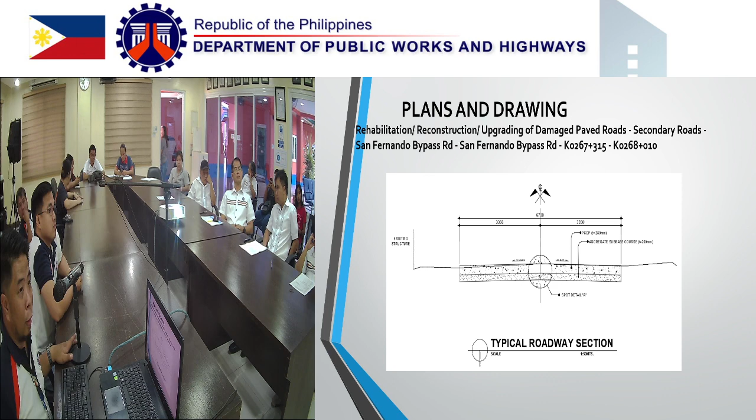The typical cross section: 6.7 meters width carriageway, 3.35 per lane. Thickness of PCCP is 280 mm and the aggregate sub-base course is 200 mm. A straight line diagram.

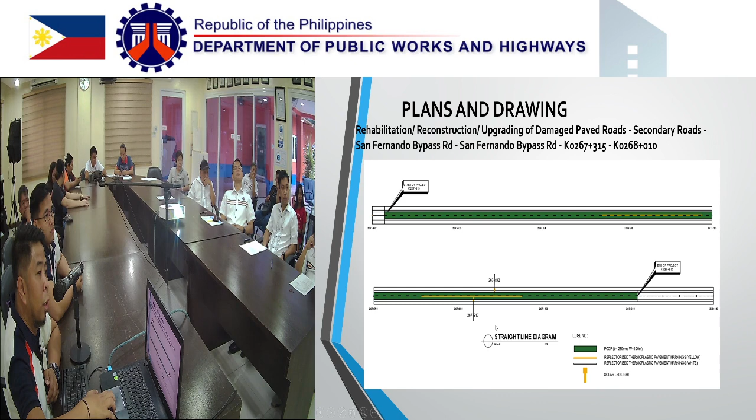So good morning to each and every one of us. So the next project is 24 AE 0022 with the title Construction, Maintenance of Flood Mitigation Structures and Drainage Systems, construction of flood mitigation structure along Barangay Napaset, Luna, La Union.

So with an appropriation of 85,982,000, with an ABC of 84,262,360, and a duration of 311 calendar days, considering all the Sundays, holidays, and rainy days. Scope of work: completion of 650 linear meter of dike and revetment at right bank.

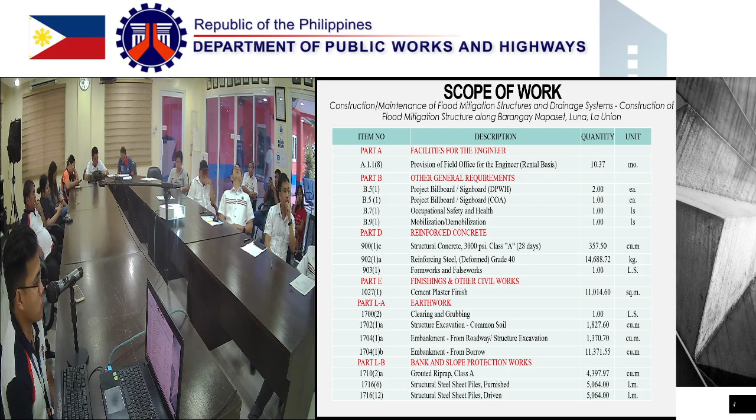So for the computation of the project duration, as what I've mentioned before, we have considered the days that fall under Sundays, holidays, and rainy days. Incorporating those and then adding to the interpolated calendar days based on the Department Order number 71 series of 2013, we come up with 311 calendar days.

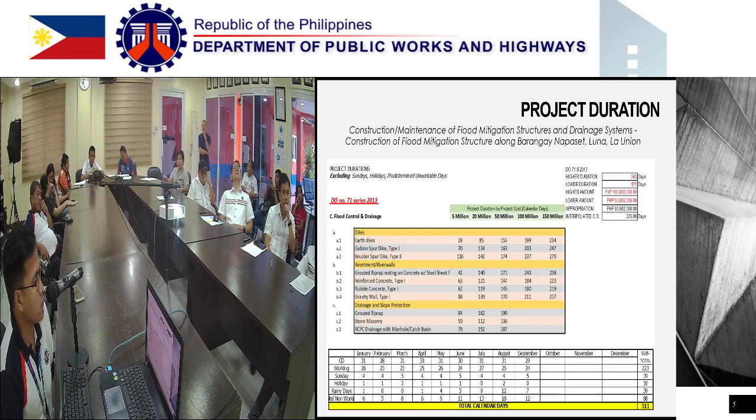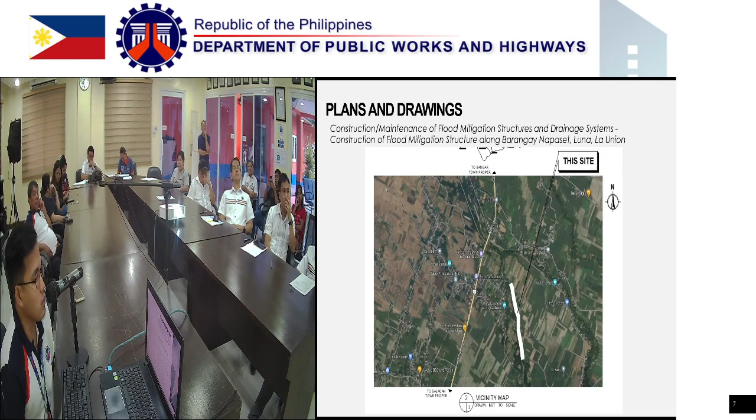So for the references and attachments, we are following significant department orders as well as the updated labor rate CMPD, which was issued by the central office. So we have here the plans and drawings.

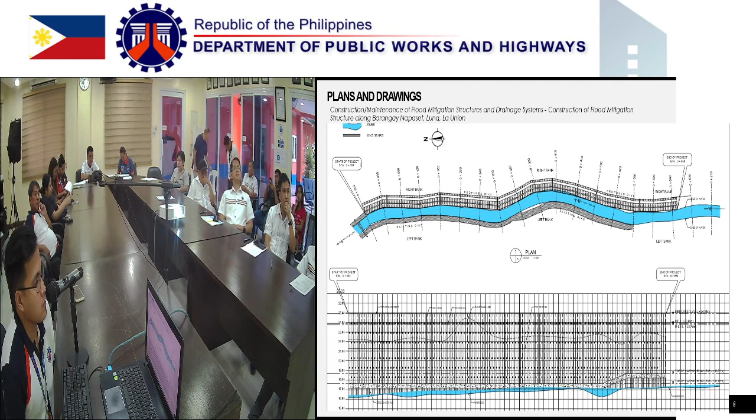And we have here the typical cross section. So for the items of work, we have here the one I mentioned earlier, 1027-1, the plaster finish, which is 50 millimeter thick. The structural concrete composes of our capping beam and the 1 meter slant height that are poured.

And then same goes with item 9021A, reinforcing steel, for the capping beam, slanted at 1 meter length. In 17021A, structure excavation, embankment from borrow, and then we also have here 17102A, grouted riprap, which is class A. So our sheet piles are 6 meters.

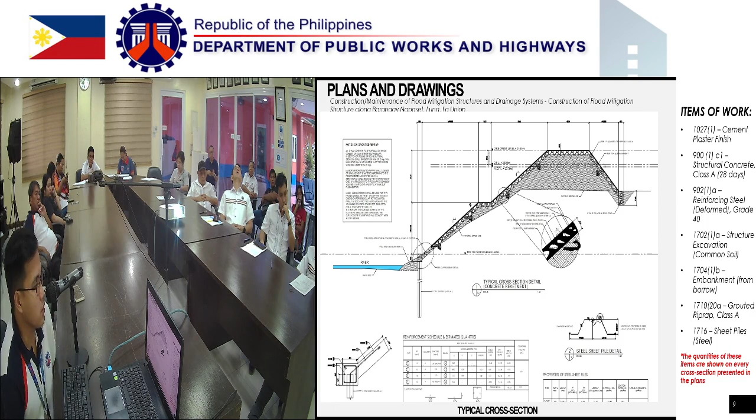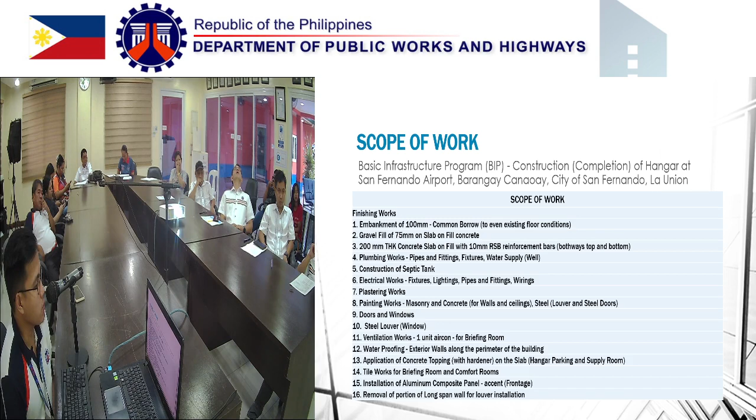Then waterproofing, exterior walls along the perimeter of the building. So application of topping on the slab for the hangar parking and supply room. Tile works for briefing room and comfort rooms. Installation of aluminum composite panel and then removal of a portion of the long span wall for louver installation.

So we have here the final program of works. For part B, we have also here the project billboard for both DPWH and COA, and B7 occupational safety and health program. Then for part C, for earthworks, we have here the structure excavation, common soil, the embankment from borrow, and then the gravel fill.

Then for structural concrete, we have the 901C, the structural concrete 3000 PSI, class A, 28 days. Then we also have here the reinforcing steel, deform grade 40, and then lastly formworks and false works.

Then for finishing and other civil works, we have here the plumbing works, ceiling 4.5 millimeter fiber cement board on metal frame, aluminum glass window, sliding, awning, and fixed type. And then for frames, jamb, steel head, transoms and mullions.

For doors, which is wooden panel. Then waterproofing cement based, glazed tiles and trims, and glazed tiles, cement floor finish, cement plaster finish. Then painting works for both masonry and steel. Then aluminum cladding, PVC doors and frames, metal structures.

Then under your electrical works, we have conduits, boxes, and fittings for wires and wiring devices, panel board with main branch and breakers, lighting fixtures and lamps. And lastly, for mechanical, we have here your ventilating equipment, which composes of our air conditioning unit.

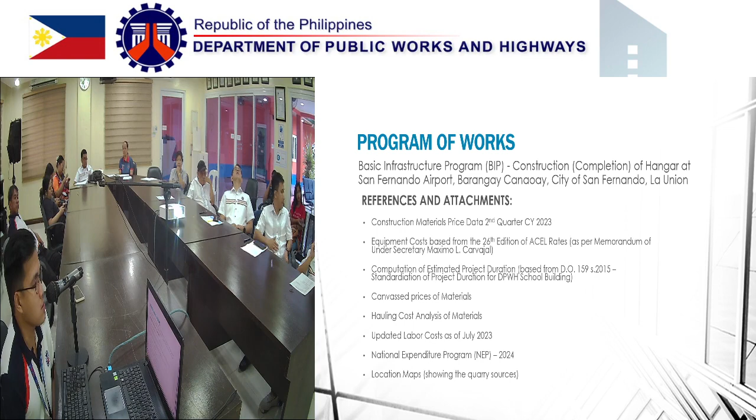As what I've mentioned before, all our program of works was based on the significant department orders and the updated CMPD labor rates and ACEL rates of the central office. Again, for the calendar days, we have also considered the presence of Sundays, holidays, and rainy days. So we have here the plans and drawings.

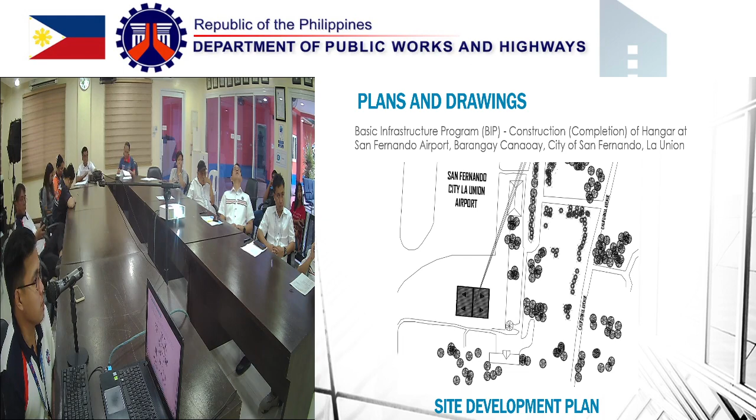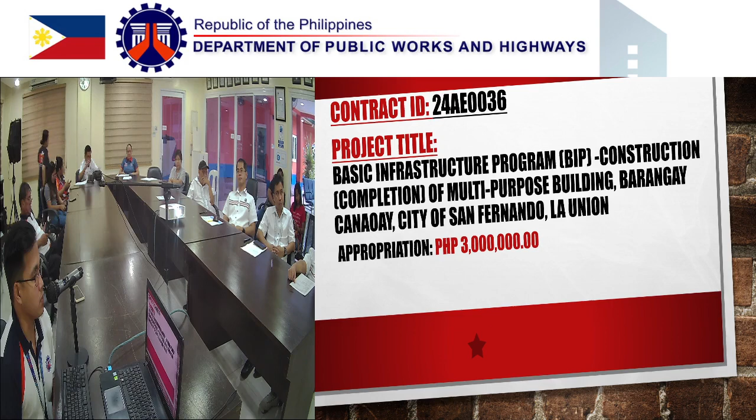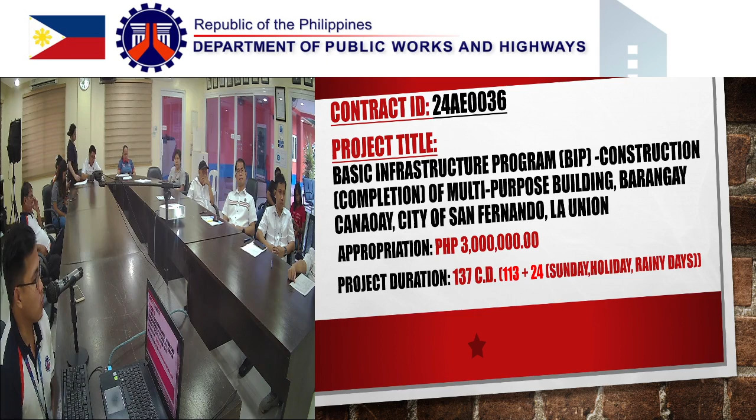For the last project, we have contract ID 24AE0036, Basic Infrastructure Program, BIP Construction Completion of Multi-Purpose Building, Barangay Canaoay, City of San Fernando, La Union, with an appropriation of 3 million and a project duration of 137 calendar days. Based on the department order, we come up with 113 calendar days plus 24 days, which comprise our Sundays, holidays, and rainy days. So we come up with 137 calendar days. So we have here the site.

So we have here the floor plan. The building was already existing. The ground floor was already fully finished. And then our second floor already has the perimeter walls but has no finishes yet, as well as the comfort rooms on the second floor, which are not yet in place. The building is 11.20 by 7.30 meters.

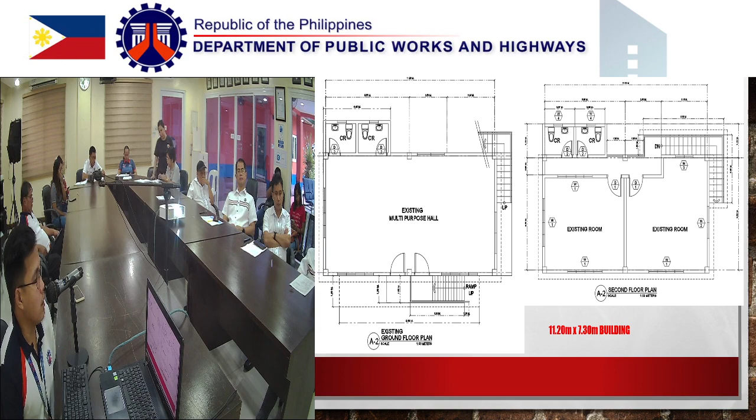So we have here the perspective. As you can see, both on the ground floor and second floor, we are going to introduce aluminum cladding as well as moldings of the barangay name and logo. Again, for the ground floor, it's already existing and fully finished, and the additional work is the aluminum cladding.

So we have here the final program of works. For Part B, we have the billboards both for DPWH and COA, occupational safety and health, and for earthworks, we have removal of structures and obstructions.

On that side, the existing ceiling of the second floor is there. But since we are going to introduce roofing, their ceiling was supported by the existing covered court. So if we do our roofing works, that will be affected. So we decided to remove and replace the existing ceiling of the second floor.

And then for plain and reinforced concrete works, item 903, we have the formworks and falseworks. And then for finishing and other civil works, we have plumbing works, ceiling - 4.5mm fiber cement board on metal frame, and ceiling on metal frame, pre-painted metal panel or spandrel as we call it. Then we have the moldings, the building name in stainless steel. Then for aluminum frame glass doors, swing type, aluminum glass windows, sliding type and awning type. Then for fabricated metal roofing accessories, we have flashing, gutters, as well as the rib-type long span.